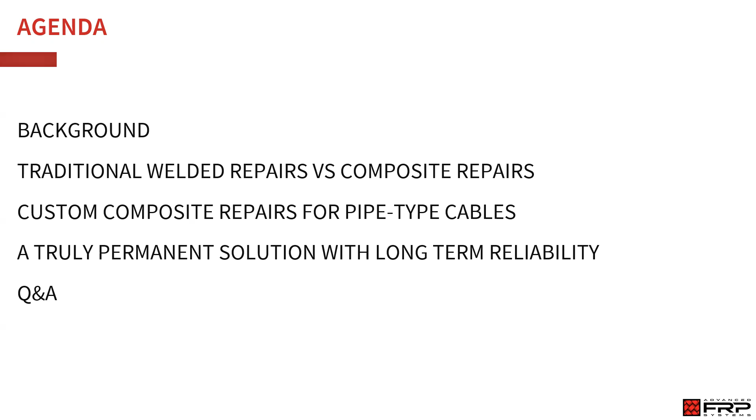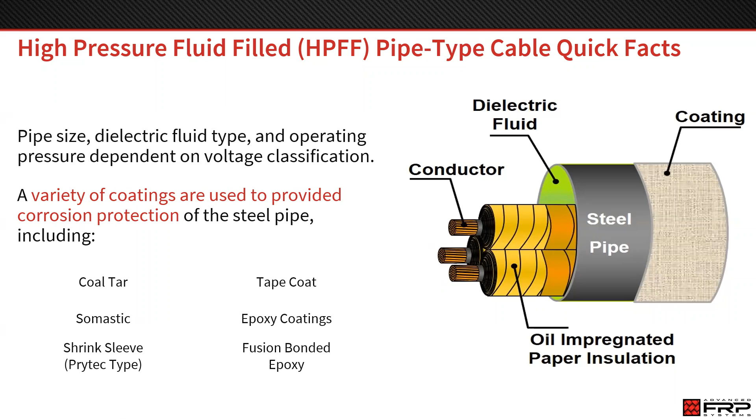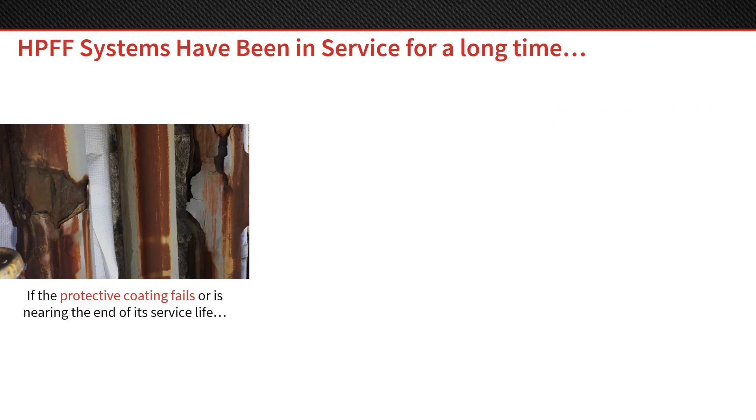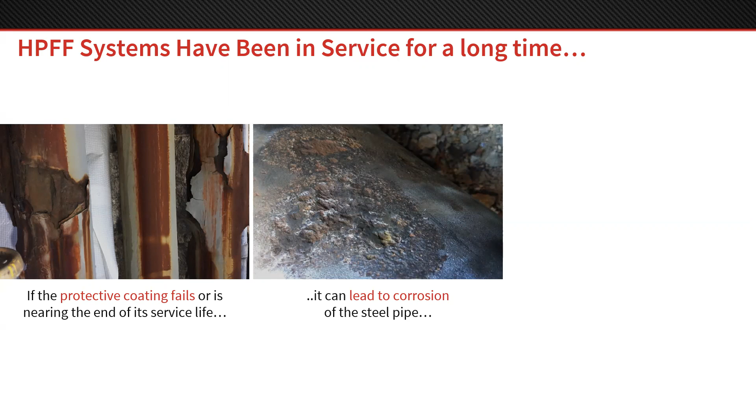Many of these systems are aging, they're over 50 years old. When they've been buried for over 50 years, the protective coating that's protecting the external shell of the pipe type cable is nearing or past the end of its service life. Once coatings are past the end of their service life, that's going to lead to corrosion of the steel host pipe. Corrosion of the steel host pipe will eventually lead to dielectric fluid leaks.

Dielectric fluid leaks can have severe financial, environmental, and service implications. One particular client has given us an estimate of about $200,000 to fix a leak in their dielectric fluid. So clearly we want to make sure that doesn't happen.

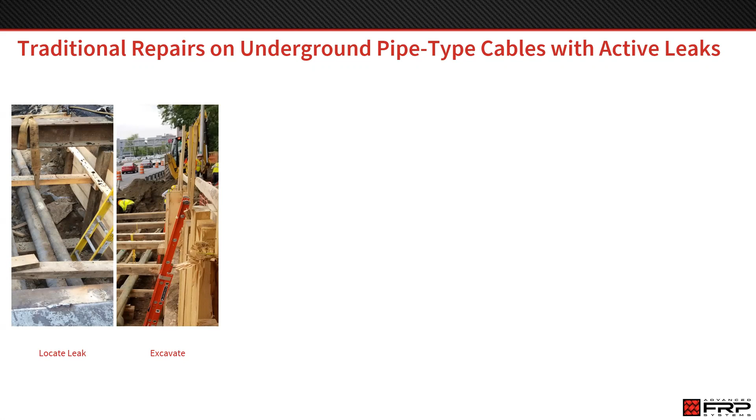There's some traditional repair options that have been used, an externally welded barrel or external welded repair. We're going to go through what an external welded repair on a pipe type cable system would look like. So the first step, locating the leak. Next, these are almost always buried piping systems, so you'll have to excavate to unearth the pipe itself for the repair. Prior to doing any sort of repairs, you're going to have to remove the external corrosion barrier, a coating or a tape coat or whatever it might be.

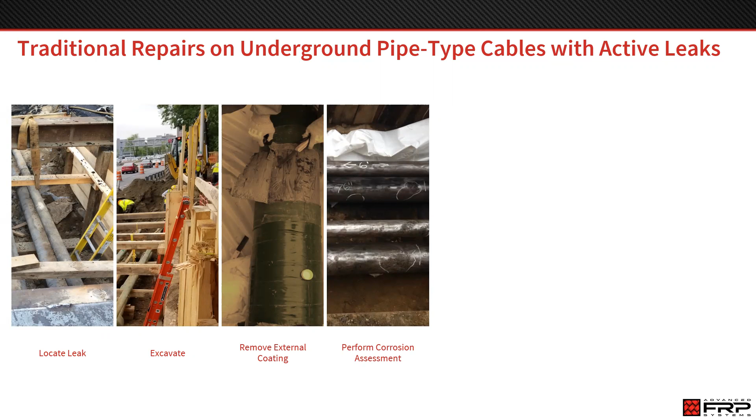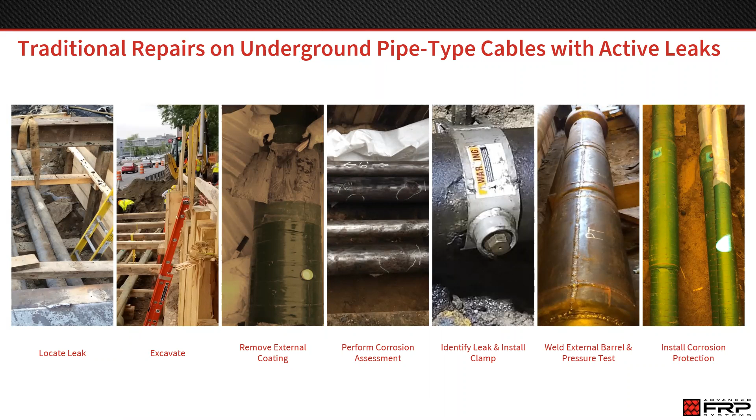If you want to repair more than just the exact spot of the leak, you can do a corrosion assessment and see where else on that area you've unearthed may be experiencing corrosion. A clamp can be installed to stop the active leak. Next, an external barrel is welded onto the pipe type cable. After that barrel is welded on, it's pressure tested to ensure there's no porosity in the welds or any leaks. And finally, a new corrosion protection barrier is installed, and then the pipes can be buried.

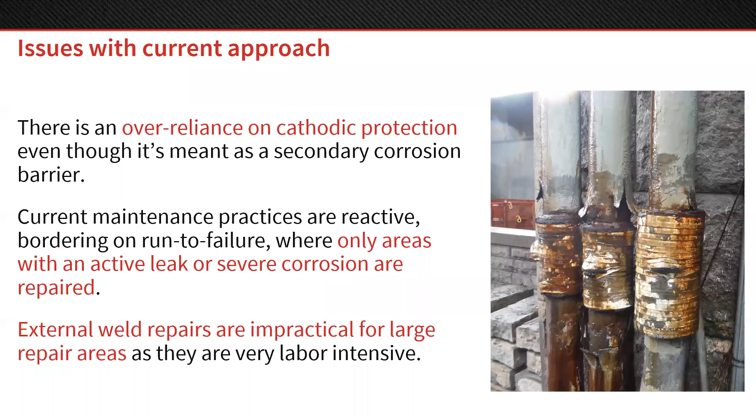Also, external weld repairs, like I showed you, those barrels, they're not real practical for large repair areas. For a spot repair, they're a reasonable solution, but if you want to repair 50 feet of pipe, it's going to be a lot of welded barrels. So, I'm telling you that it's a reactive solution. Are there better solutions out there? And I think the answer is yes, and that's what we're going to talk about here.

Composite repairs for piping systems are something that have been around for a while now, and they're pretty popular in other industries, in power generation, including nuclear power generation, even safety-related piping in nuclear generation. They use carbon fiber composite repairs for critical piping systems. In the oil and gas industry, they're using composite and carbon fiber repairs for pipes, and in water and wastewater. So it is a pretty extensively used process for repairing pipe externals.

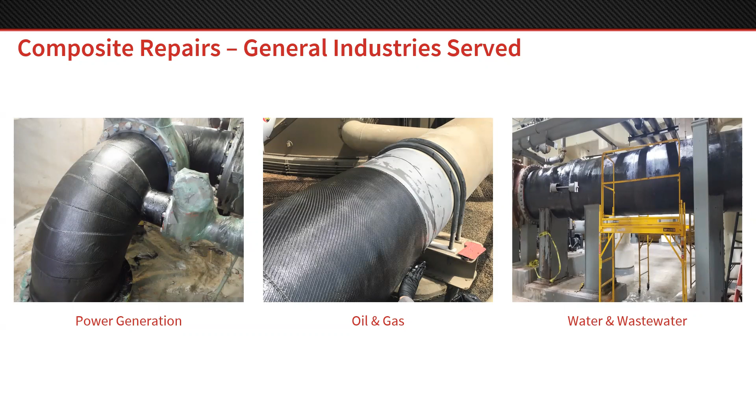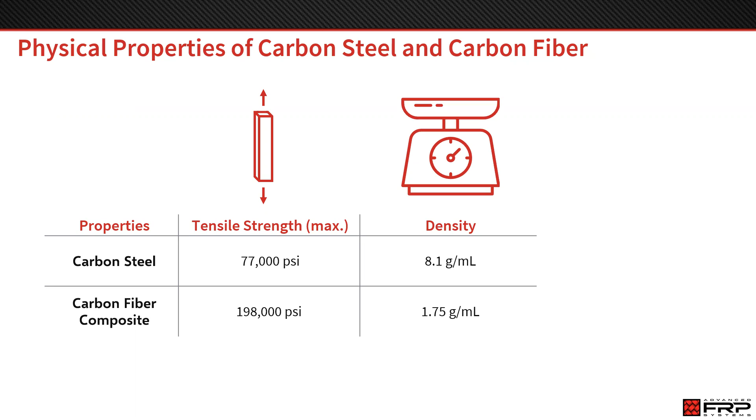Why are we talking about carbon fiber as a solution? So let's dig into that. First, the tensile strength of carbon fiber. It's a really strong material. You can see it's about 3 times the tensile strength of carbon steel. The density is also very low. So if you're doing repairs on bridge crossings and other suspended lines, the weight of a carbon fiber repair is significantly lower than that of a barrel repair.

Finally, the thermal conductivity. Carbon fiber is a non-metallic, so it is lower in thermal conductivity than a metal like carbon steel. But for reference, a general corrosion-resistant coating is going to be closer to 0.2 watts per meter Kelvin. Carbon fiber is at 8 watts per meter Kelvin and is actually extremely thermally conductive for a non-metallic. This is crucial for underground feeder lines because they rely on the dissipation of heat. So carbon fiber will not inhibit the dissipation of heat through the pipe wall.

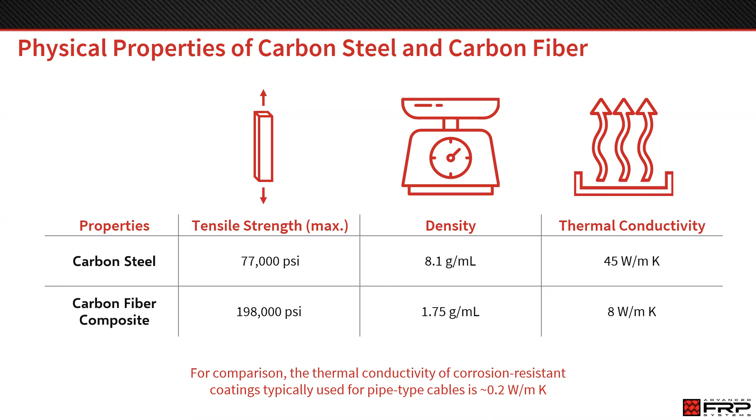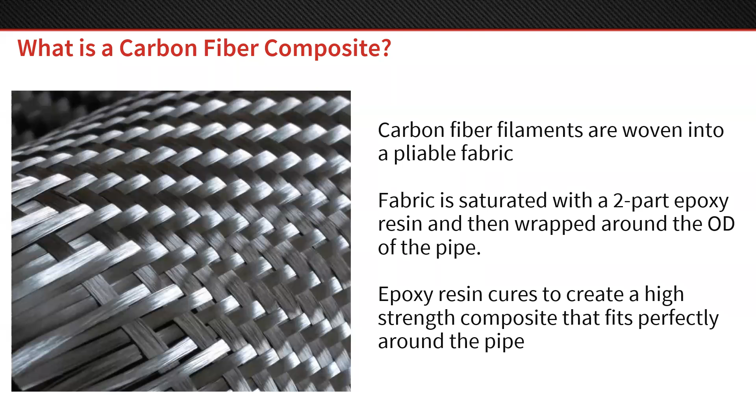So what is a carbon fiber composite? Let's kind of dive into that. The basics of it, we take carbon fiber filaments, they're woven into a pliable fabric that you can see here. This fabric is saturated with a 2-part epoxy resin, and then it's wrapped around the OD of the pipe. The resin cures through a chemical cross-linking mechanism, and it creates a hard, strong composite that fits perfectly around the outside of the pipe. You can see a repair in action right here.

The reason that this repair is very different than just a coating system is the carbon fiber is fully structural. It creates a secondary pressure boundary capable of containing up to 1,000 psi of internal pressure. It's non-metallic, so it doesn't corrode as well. So there's no coating system that can fail. This is going to last 50 plus years in the ground without having any corrosion. And these composite repairs are done with these feeders still in service.

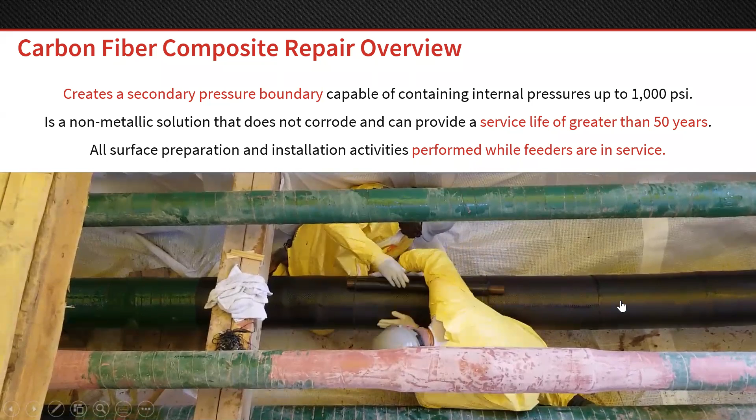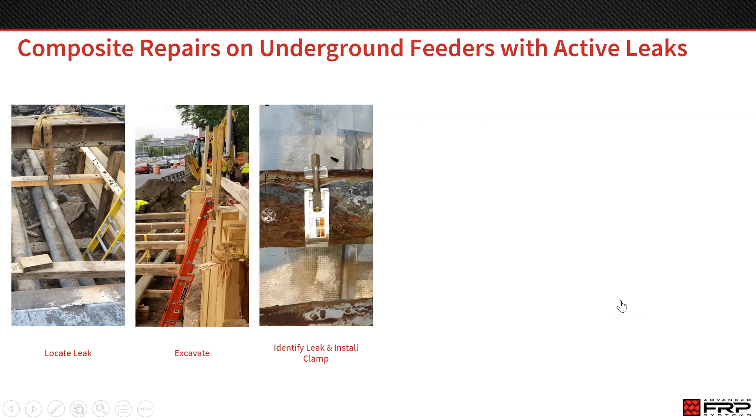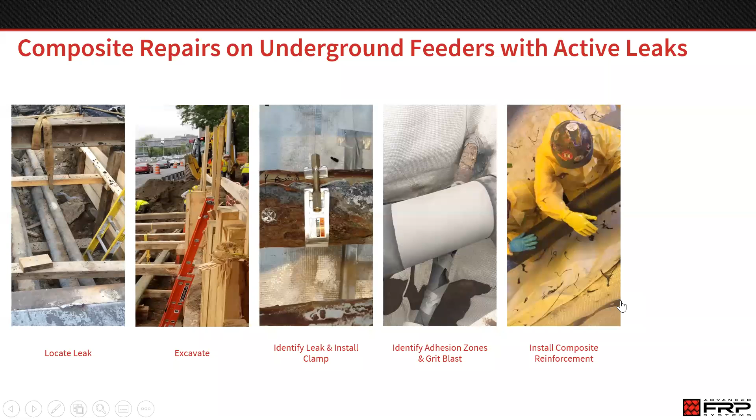All right, let's talk about a composite repair and exactly what it would look like. So in the same scenario with a leaking feeder line, the first 2 steps are the same. We locate the leak and we excavate. After that, we actually don't have to remove the existing coating. We just put a clamp on it or use another technique to stop the leak. After the leak is stopped, we will identify something called an adhesion zone, and we'll grit blast on either side of the leak where the adhesion zone is, and that will allow us to wrap this pipe. Finally, we'll install the composite repair system and we'll apply a top coat.

So we looked at 2 scenarios, one using external welds and the other using a composite, and they're fairly similar. Some distinct differences and some advantages of the composite, but I want to highlight one really important point of the composite repairs. It's this adhesion zone technology. I touched on it on the last slide. What this means is it's really efficient to do large-scale repairs with composites. The exact opposite of welded repairs, where it's really efficient to do a small welded repair, but large repairs are difficult. We can wrap up to 50 linear feet of cable in a single shift without fully removing the external coating, without any welding, and without performing a comprehensive corrosion assessment.

The key to it is, like I said, the adhesion zone technology. We can encapsulate 100 feet of feeder lines, and we only remove the coating and grit blast 3 feet on either end. So 94% of that surface does not have any surface preparation outside of just cleaning off some dust, dirt, and debris and smoothing it off. So this is cutting down over 90% of your surface prep. It's also crucial because a lot of these feeders have been in the ground for, like I said, 20 to 50 years.

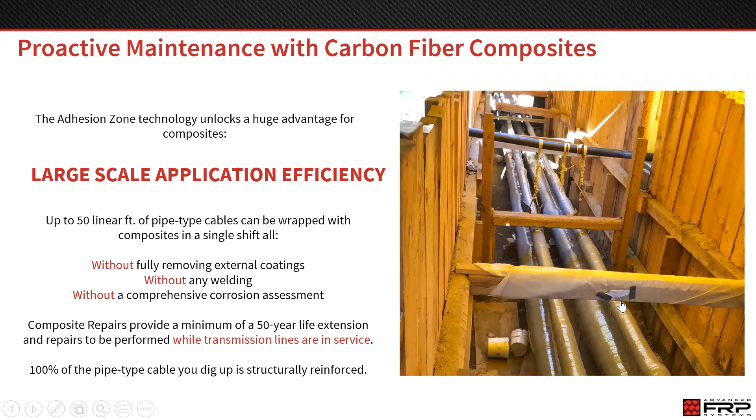Plus, when you do a composite repair, you're reinforcing 100% of the cable that you unearth. So if you dig up 100 feet, you can reinforce 100 feet. If you dig up 1,000 feet, you can easily reinforce 1,000 feet, giving yourself a minimum of 50-year life extension. And this is all done with these transmission lines in service.

So I've told you a little bit about composite repairs. Let me tell you about composite repairs that are specific to pipe type cables. So in order to ensure that the composite repairs wouldn't have any effect on these underground power transmission lines, we had to do a lot of testing. We did thermal conductivity testing of the composite itself to be able to model how heat would flow through it.

And then a full heat transfer study was performed on an underground power line with a carbon fiber composite on it. We wanted to ensure that we were going to allow heat to dissipate through the system, even with large scale composite repairs. We also wanted to do something called a freeze test.

Some of our clients used liquid nitrogen to freeze the dielectric fluid inside of these lines in order to do internal repairs of the conductors. So we wanted to ensure that they would still be able to freeze the dielectric fluid, and that freezing with liquid nitrogen at below minus 300 degrees Fahrenheit, thermal shock wouldn't damage the pressure capacity of our carbon fiber repair. So we did those thermal tests.

We also do a lot of pressure testing. We had to complete a comprehensive ASME PCC-2 Table 1 test protocol to verify that we could comply with this specification for non-metallic repairs. We also did a lot of live hydrostatic tests. So we're not going to test this when it's in the ground. So we basically had to test every scenario we were going to run into.

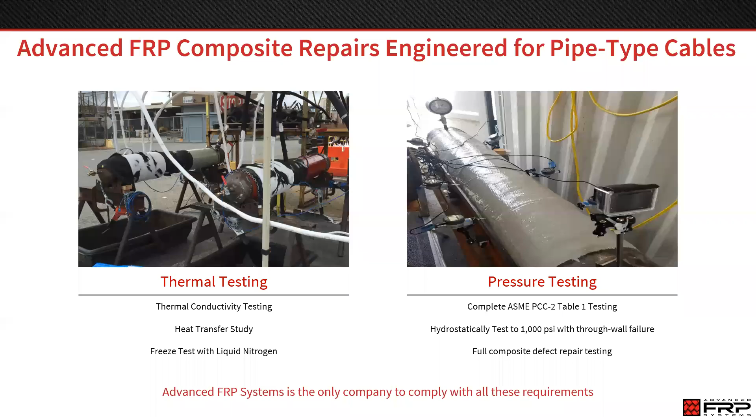We've done a lot of work in the field as well. So you can see starting in 2016, we did some pilot work. We've done work in tunnel systems. We've done high pressure gas filled lines that were at bridge crossings. We've also done spot repairs of horizontal directionally drilled piping systems. We've reinforced lead sheath feeders, and we've done work inside of manholes with huge splice joints and other things on the pipes.

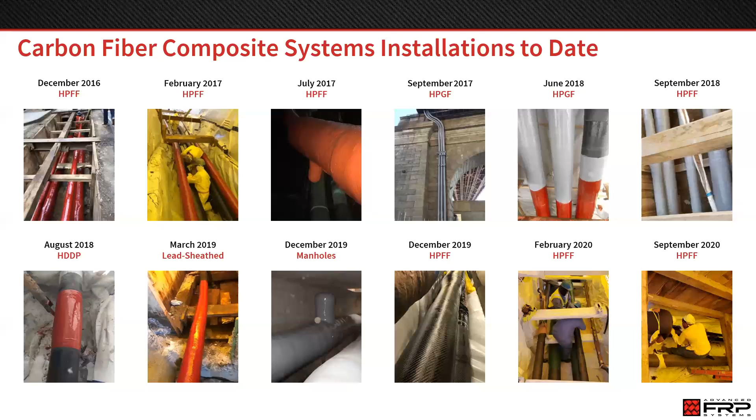So I'm going to kind of talk you through why we have shown that this is a truly permanent solution for repairs on pipe type cables. Advanced FRP has reinforced more than 12,000 linear feet of pipe type cables with our carbon fiber composite system. And we've seen a lot in that process, and we've been able to ensure that our system was not only compatible with the things that we ran into, but would provide that same 50-year service life in all these different scenarios.

So the first thing we ran into, an underground high pressure fluid filled pipe type cable that had stray current in that area that was greatly accelerating the corrosion rate. This complicated our repair in two ways. One, there were dozens of pre-installed barrels or externally welded repairs. So it wasn't a straight pipe anymore. And two, we had to look at how that stray current was going to affect the carbon fiber composite.

We were able to fully reinforce this section of feeder, over 10,000 linear feet of pipe with a 6-layer carbon fiber composite system. We showed that it was not affected by the stray current and that it would completely eliminate the corrosion of the host pipe, as well as providing a secondary pressure boundary.

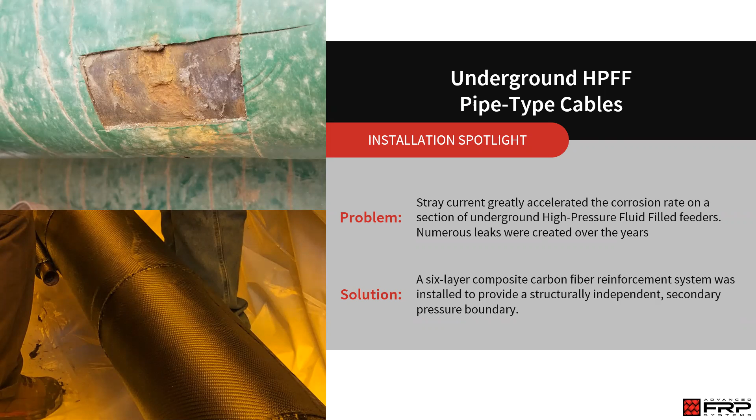We also ran into some unique issues with high pressure gas filled pipe type cable systems. So certain utilities at bridge crossings switch from dielectric fluid to nitrogen gas. So on these feeders, they were a gas filled feeder system, and there were numerous leaks on this particular feeder system we reinforced. Not only were there numerous leaks, but the pipe supports themselves were aging in pretty bad shape. So the amount of weight that we added to these feeders was critical.

With carbon fiber, the low density that I showed you, we were able to add a minimal amount of weight while providing a completely leak-free system, even with numerous through-wall failures. And this was all done on vertical piping and piping with irregular elbows. So we had no issues with the vertical piping, and no issues working on scaffolding or with the elbows.

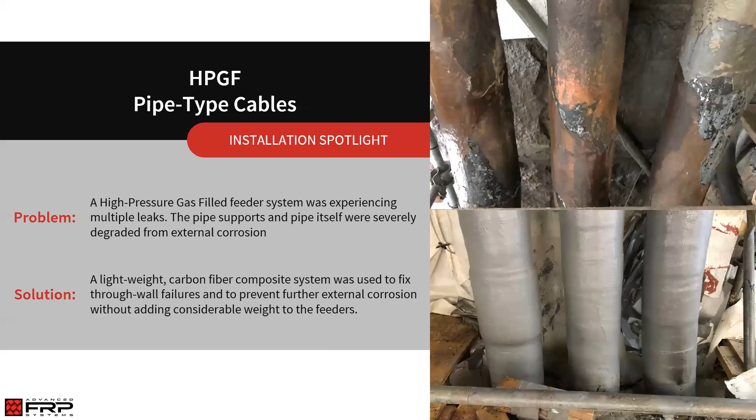Another issue we saw in the field was on something called a horizontal directionally drilled piping. Sometimes when you can't dig a big trench in an area for whatever reason, this is another technique where you basically drill or bore a hole in the area and you pull the pipe through. This particular utility had used a traditional girth weld protection system. So, they had thought about the fact that their girth welds could be damaged during this process. Unfortunately, for whatever reason, the system that they chose wasn't up to the task, and they have leaks at several girth welds within their horizontal directionally drilled section of pipe.

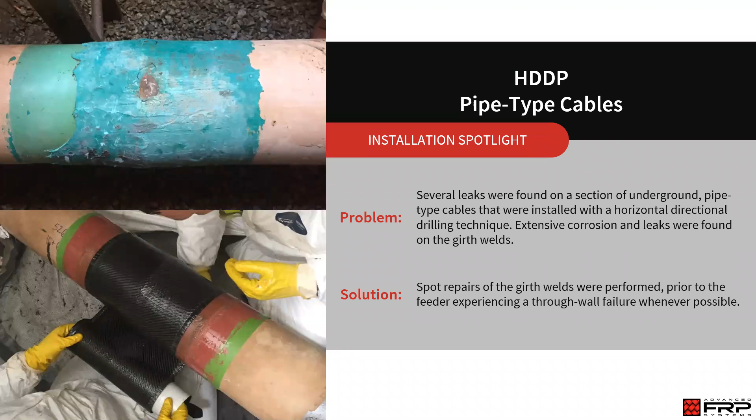So because we knew these were isolated leaks, we were able to do spot repairs. The key on this repair, doing spot repairs, these weren't particularly old feeder lines. We needed to tie back into the existing coating and not leave the opportunity for spot corrosion at the end of the repairs. So we were able to design a system that could be tied back into the existing coating. We were able to spark test it to verify that there were no gaps or voids in our coating system, despite the fact that we used a carbon fiber composite.

We also ran into an issue where a lead sheath feeder was leaking. These are lower pressure feeder technologies, but the lead sheath is much softer than a standard carbon steel pipe. So grit blasting was not feasible. So we validated an alternate surface preparation method for the adhesion zones on this lead sheath feeder. And we were able to design a custom solution that protected the lead sheath feeder, prevented any leaks, adhered to the surface with over 2000 psi of adhesion. And also we needed to make sure we didn't create a stress point at the end of the carbon fiber. So we had to taper that carbon fiber down so that there wasn't a stiff point right at the end.

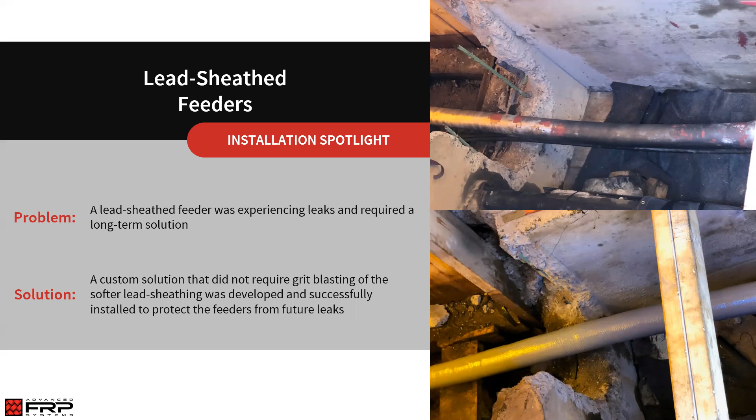And the last installation spotlight was for a manhole. We've done several manholes with carbon fiber composite. A particular utility was experiencing corrosion in their manholes. Everyone has manholes in their feeder systems. Manholes are particularly difficult locations because it's an intermittent immersion condition. So you can get salt water runoff from the road, high humidity levels, all sorts of detrimental things to the steel that's going to be in those conditions. So we see varying degrees of degradation in manholes, and you often can't tell how bad your manhole is until you completely remove the existing coating and do an assessment.

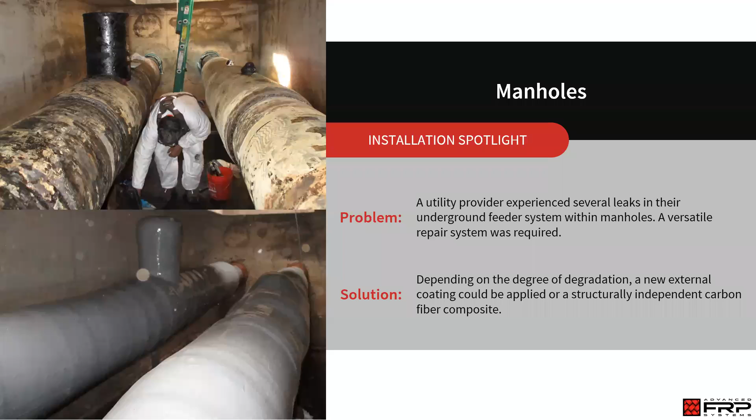So what we did was we developed a versatile repair option. So if you remove all the coating and there's significant corrosion, we can fully structurally reinforce the manhole feeder with carbon fiber. If there's less significant corrosion, spot structural reinforcement can be installed, or you can do a partial structural reinforcement where you're just enhancing the strength of that steel pipe. Finally, you could just do a better protective coating system, a newer coating system, to allow you to get a long-term life extension.

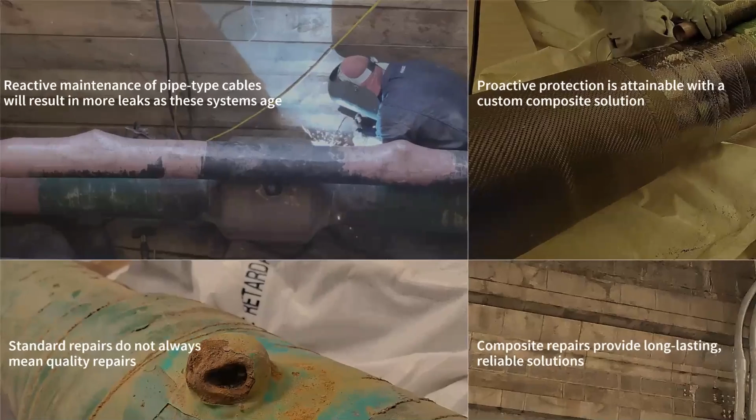So to quickly summarize what we talked about, I know there's a lot of points in this presentation that we touched on, but if there's just four things that you take home from this presentation, this is kind of what it is. One, reactive maintenance of pipe type cables is going to result in more leaks as these systems age. So no matter what you do, if you're only fixing leaks that form and you have a coating system that's past the end of its service life, you're going to get more and more corrosion. In year one, you might have one leak. By year 10, you could have 50 leaks in your system if you don't start to take advantage of a more proactive system.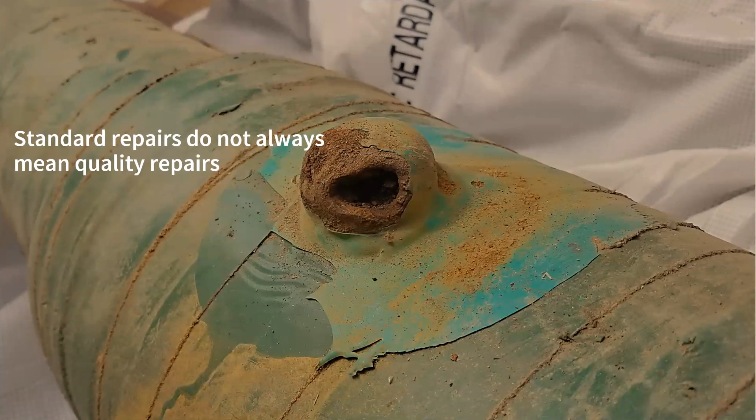Second, standard doesn't mean good. There's a lot of industry standard stuff that people have just done. It doesn't always stand the test of time. We've seen many areas where the standard repair did not work, and alternate, better repair systems are certainly the way to go.

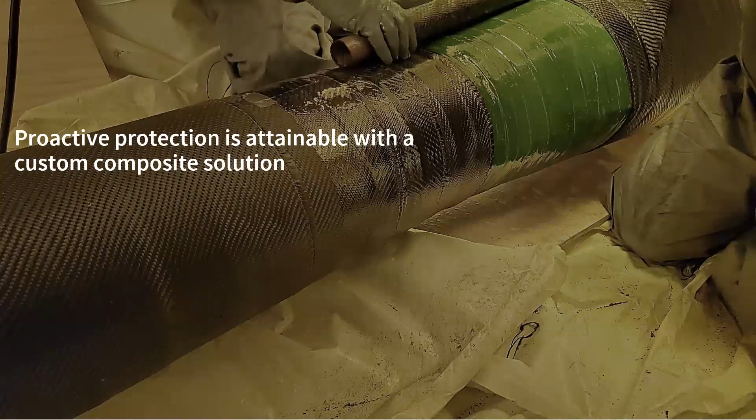Proactive protection is possible with composites. So by using this adhesion zone technology where you don't have to remove that existing potentially hazardous coating on your pipe type cables, we can reinforce larger sections of cables. We can do it economically, we can do it fairly quickly. So all of a sudden there is an alternative to reactive maintenance: proactive maintenance with composites.

It provides a long-term and highly reliable solution. We have not had any issues with any of the feeder lines that we have reinforced. They've all withstood the test of time, even in extremely challenging conditions like stray current or pipes on the side of bridges that have salt water running down them. So this is a reliable, tried and true system for reinforcing pipe type cables.